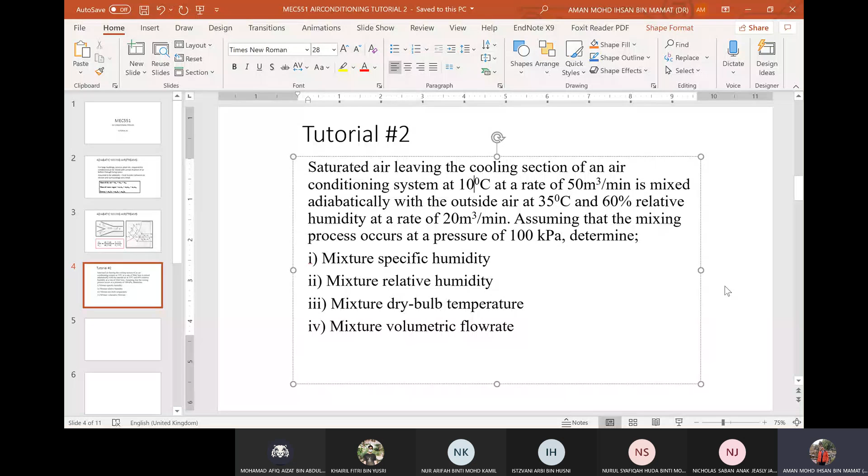Alright, so last week we have gone through the part 1 sections for the air conditioning. So today I will proceed. I will continue with the second part of the tutorial, which is we're going to look at the adiabatic mixings of the air stream. So which is actually for the adiabatic mixing of the air stream, usually we are concerning about the energy consumptions for the building.

For treating the air that enters the building, one of the, for example, if you are dealing with the cold environment, and then in order to increase to the required temperature or desired temperature, you have to put some heaters to heat the fresh air, and then bring it to the environment that we are required. So this heating process requires the use of energy.

Okay, so one of the innovative methods that have been presented, which is actually we can return the air that have gone through the room environment, and then we return that air and mix it together with the fresh incoming air. So as you know, the room air is at higher temperature because it takes the heat from the human or spaces that it has cooled down.

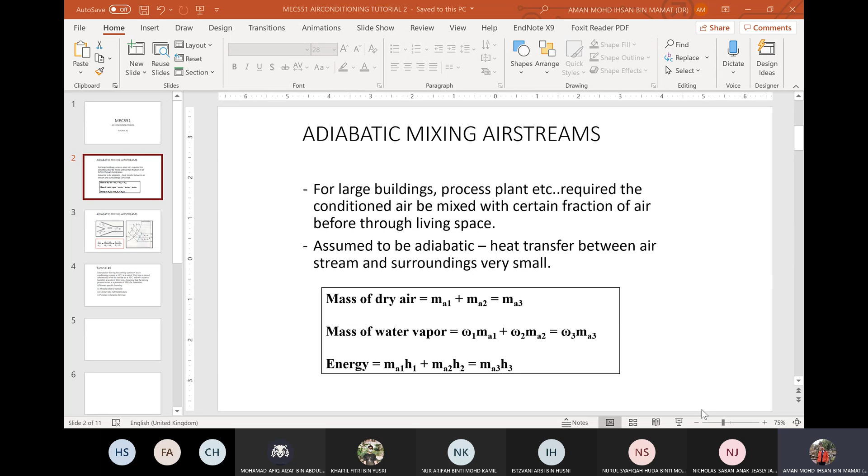Okay, so if we take the mass balance, this is a mass balance for the required conditions, where you have to do the mass balance for the dry air. Okay, so whereby we have the stream 1, and then this is stream 2.

With the stream 1 temperature T1, relative humidity phi 1, and then specific humidity omega 1. And then for stream 2, the temperature coming at T2, phi 2, and omega 2. And then it leaves in the mixture region condition as state 3, where the temperature T3, relative humidity phi 3, and then omega 3 for the specific humidity.

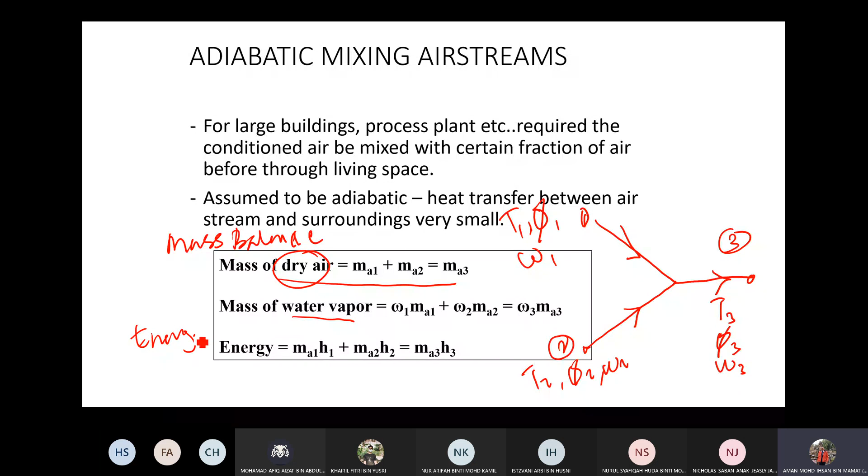So bear in mind in the air conditioning process, or in all of the fluid mechanics and thermodynamics processes, that you have to do the mass balance and energy balance. So the mass balance that we have here in the air conditioning process is you have to split between the dry air mass balance and water vapor. Okay, and then that's why you have to do the energy balance.

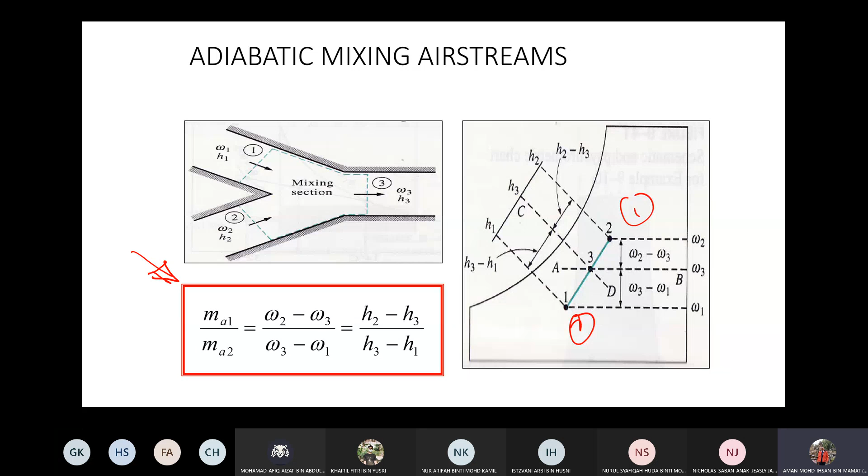So it's going to be a different way of how you interpret the technical perspective of this. Okay, so the equation, the correlation will highly depend on how you derive the correlations, based on the mass balance and energy balance.

Okay, so as for our tutorial, the second tutorial, what is the essence of this tutorial, the outcome that I want to give to you today, is that first you have to do the process for the adiabatic mixing. And the second one, we are not going to use the psychrometric chart for this one.

So because why? Because the mixing process occurs at the pressure of 100 kPa, which means that the psychrometric chart is invalid for these particular conditions.

Okay, for this tutorial number 2: saturated air leaving the cooling section of an air conditioning system at 10 degrees Celsius at the rate of 50 meter cube over minute is mixed adiabatically with the outside air at 35 degrees and 60% relative humidity at the rate of 20 meter cube per minute. Okay, assuming that the mixing process occurs at a pressure of 100 kPa, determine the mixture specific humidity.

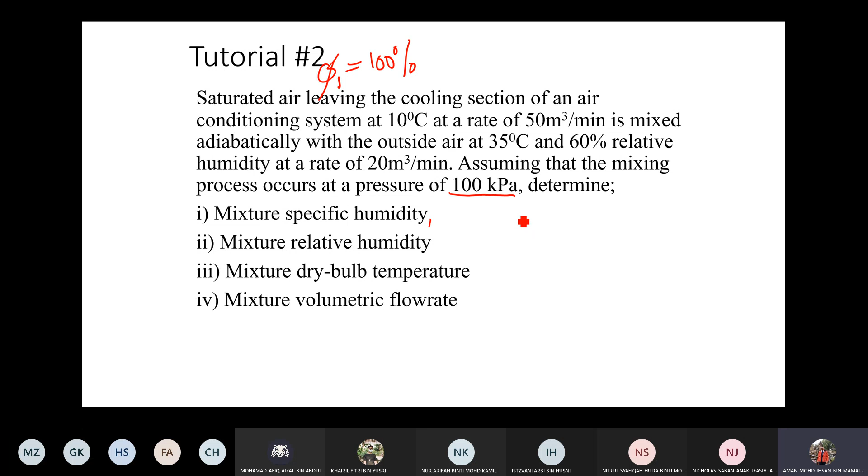Okay, so if we draw a schematic diagram, for this is state 1, where at state 1, T1 equal to 10 degrees Celsius, phi 1 equal to 100%.

Okay, come with the state 2 condition, T2 35 degrees Celsius, relative humidity phi 2 60%, and then the volume flow rate equal to 20 meter cube per minute. V1 equal to 50 meter cube per minute.

Okay, so you need to convert that to seconds later. And then leave it with a mixture, we don't know what will be. So the temperature T3 we don't know, V3 we also don't know, and then omega 3 we don't know how much.

And then M dot A, of course you can get M dot A3 equal to 50 plus 20, this is 70 meter cube per minute. So we note that the inlet, this one is S1, this is S2, and this is S3. Okay, for the state 3, okay, so let's say

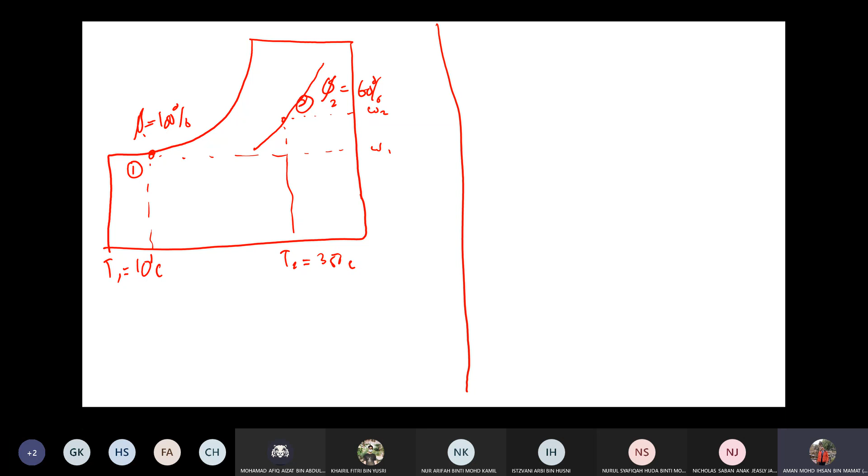Okay, so this is the omega 2, this is omega 1, but it is not exactly happening on the psychrometric chart, because this is just the psychrometric chart. You cannot take the data, just use this one to visualize what are the processes that happen, if it happens on the psychrometric chart, so that you can pre-estimate where will be the location, or the state of the processes that happen at the beginning and ending of the processes on the psychrometric chart. Okay, so this is state number 3.

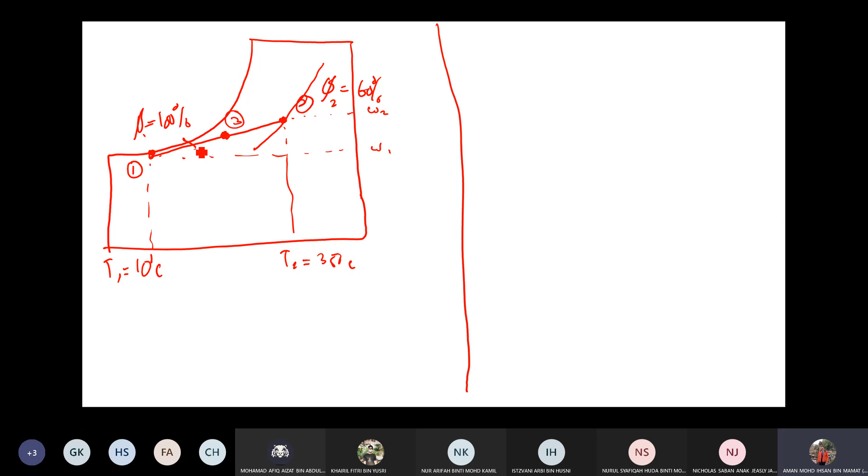Okay, so which means you will be in between, this is in between the line. So this we don't know the temperature, T3, we don't know. And then relative humidity, we also don't know what will be the relative humidity and the specific humidity. So this is omega 3.

Okay, and then if you project with H1, H2, okay, so this is H1, sorry, this is H2, this is H3. Okay, so let's do the calculation.

Okay, firstly for state 1, okay, state 1, at state 1, the temperature T1 is 10 degrees Celsius, P1 equal to 100 kPa, P atmosphere, P pressure, P total, summation of pressure, and relative humidity equal to 100%.

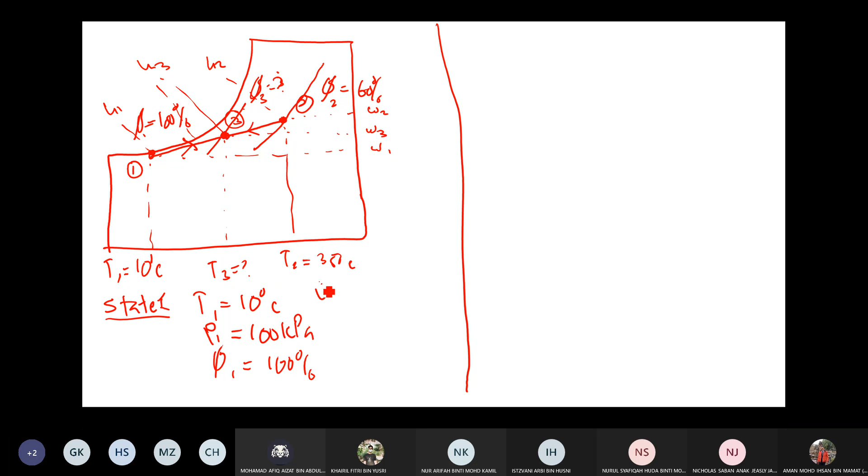Okay, so first we need to convert this, V1 equal to 50 meter cube per minute. Okay, so because you have to do the mass balance and energy balance, firstly it is not in the right form that we want for the mass flow rate.

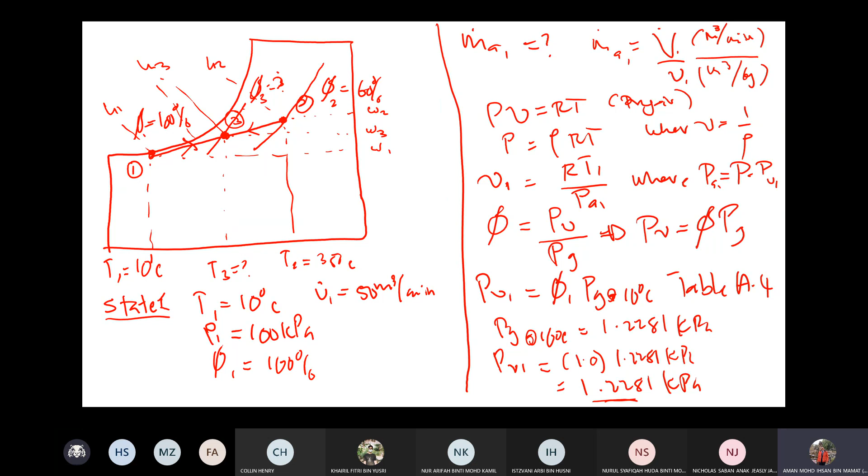And then belahkan lagi saya punya ni. So PV dah ada, you kena dapatkan nilai apa dia? PV dah ada. Previously, nilai RTA. Okay, so V1 sama dengan RT1 over PA1.

Which is R gas constant for dry air. Berapa nilai dia? 287 kan? 0.287 kPa, boleh jugalah nak pakai that value. 0.287 kilojoule per kilogram, ya kita pakai ni terus.

Degree Celsius. And then T1 sama dengan berapa tadi? Oh sorry, this is Kelvin ya. T1 is 10 degree Celsius. Jadi 273.15 plus 10 degree Celsius. Bahagi dengan PA. P adalah 100 minus 1.2281 kPa.

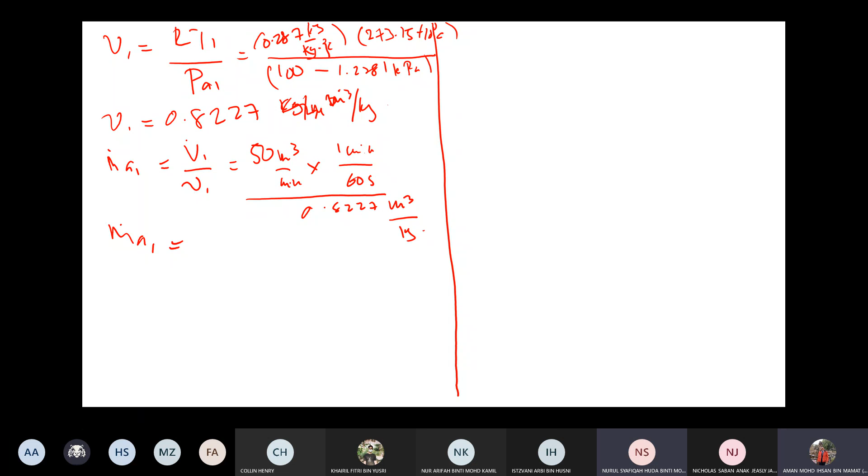Okay, yang ini you kena darabkan dengan 1 minit sama dengan 60 second bahagi dengan 0.8227 meter cube per kilogram. So m.a1 is equal to berapa? Berapa m.a1? 1.0129, 1.013 lah kilogram per second ya.

So that's m.a1. Omega 1 berapa? Omega 1 sama dengan apa equation? Omega 1 sama 0.622 PV1 over P minus PV, betul tak? Betul. Okay so jadi equationnya 0.622 darab 1.2281 kPa over 100 minus 1.2281 kPa.

So berapa unit omega 1, specific humidity? Berapa nilai dia? 7.73 exponent negative 3, 7.73 gram per kilogram of dry air. Eksponen negatif 3 ialah 7.73 gram per kilogram of dry air, ataupun you kalau nak gunakan that value yang lebih bagus, 0.00773. Betul, ya, kg of H2O over kg of dry air.

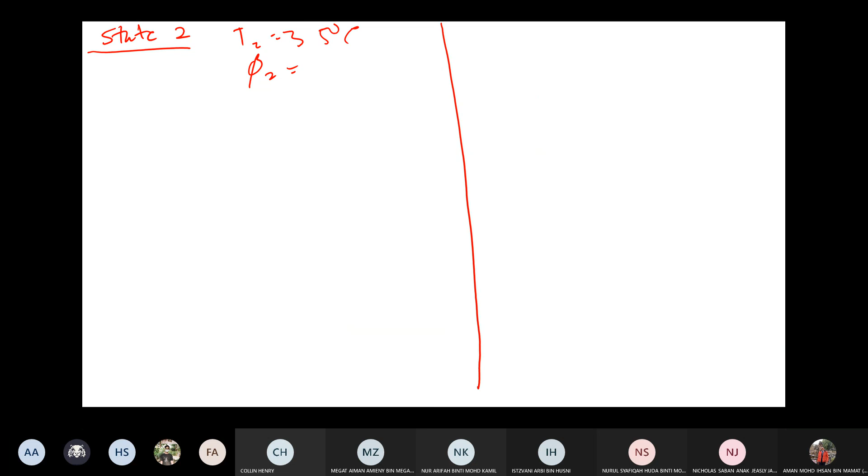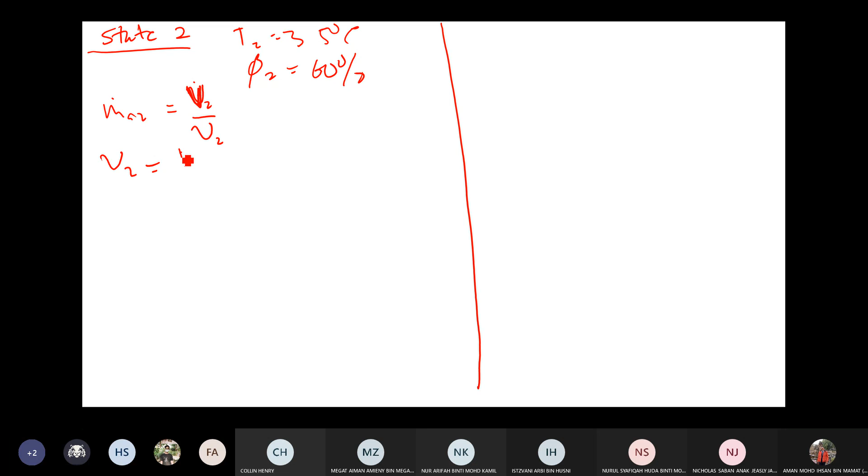Relative humidity 60%. Okay so again you kena dapatkan nilai M dot A2, which is M dot A2 equal V2 bahagi dengan specific volume V2. Okay so where V2 sama dengan RT2 over PA2. Which is PA2 sama dengan apa?

PA2 sama apa? 0.6 darab PV2. Sekejap ya. 0.6, okey sekejap, ya 0.6 darab PG at 35 degree Celsius sama dengan berapa? PG at 35 degree Celsius, 5.6291.

You kena tengok table ya, 5.6291 kPa. So you have to look at table A4. Okay look at table A4. So V2 sama dengan 0.287 kilojoule kilogram Kelvin, T2 35 degree Celsius, 273.15 plus 35 over PA2. PA2 is equal to 100 minus...

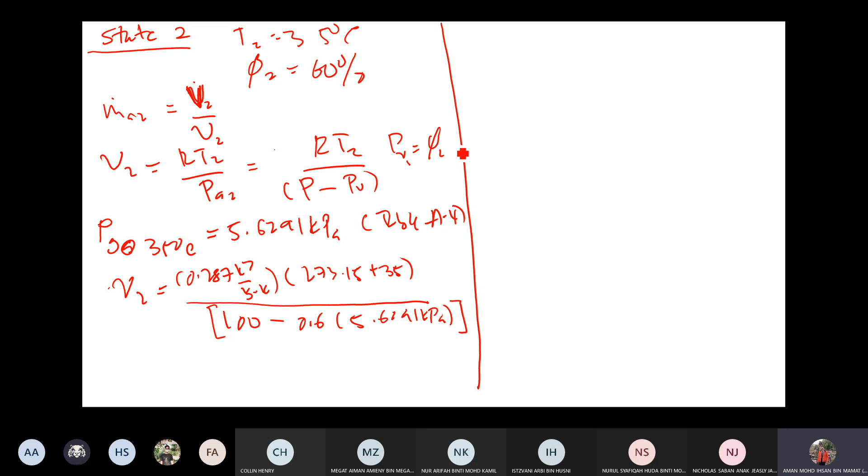Okay, RT2 over P minus PV. Okay, where PV is equal to, PV2 sama dengan phi 2 kali dengan PG at 35 degree Celsius. Ni puncanya. Okay, so berapa tu nilai V2? 0.6... 0.915, unit dia meter cube per kilogram.

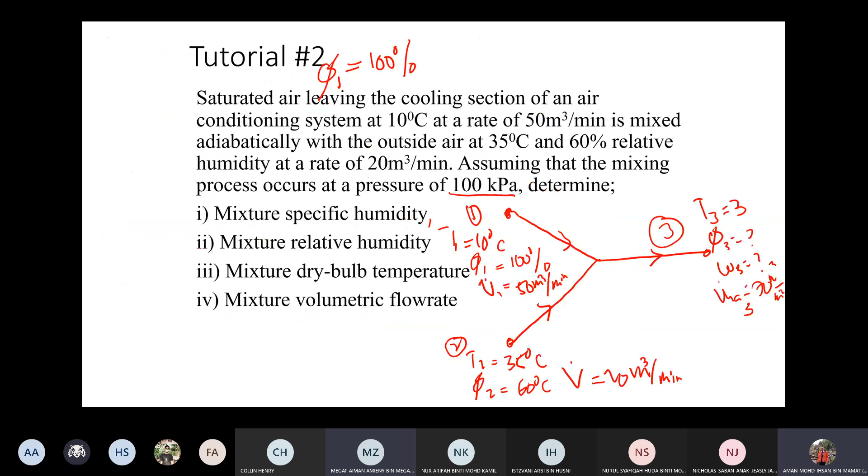So m dot itu sama dengan bla bla bla. Berapa? 0.364 kilogram per second. Okay, alright, so dah settle yang itu, kita kena dapatkan nilai omega 2.

Omega 2 sama dengan 0.622 PV over P minus PV. Okay.

0.622 PV. Tadi kita kira 0.6 darab dengan 5.6291 kPa over 100 minus 0.6 darab 5.6291 kPa. Okay, so omega 2.

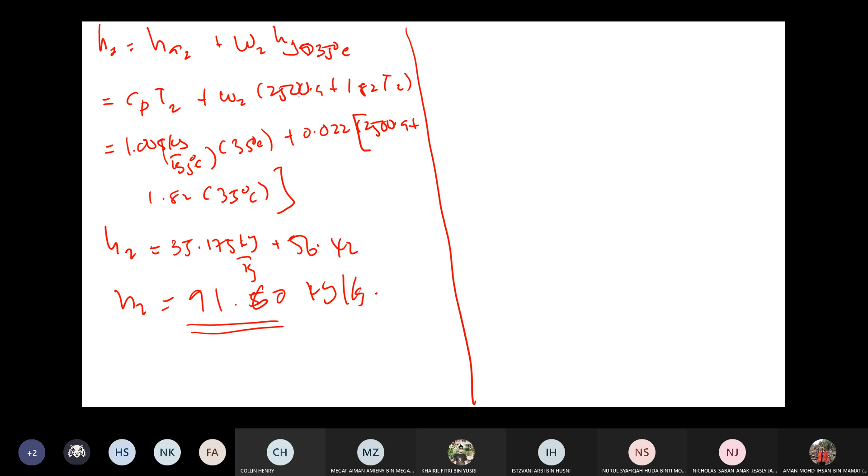So from here, you kena buat mass balance dengan energy balance. Okay. So information dah dapat. So kalau you guna psychrometric chart, all this information you boleh dapat within 3-4 minit. You tengok dalam psychrometric chart, you tarik data tu, you boleh dapat terus. But if it is not equal to 1 atmospheric pressure, then you have to do the calculations.

Okay, mass balance. We do the dry air mass balance, yeah. M dot A1 plus the summation of mass in equal to the summation of mass out. So untuk dry air, M dot A1 plus M dot A2 equal to M dot A3. So M dot A1,

Berapa tadi M dot A1? 1.013 kg per second plus 0.364. Berapa tu nilai dia? 1.377.

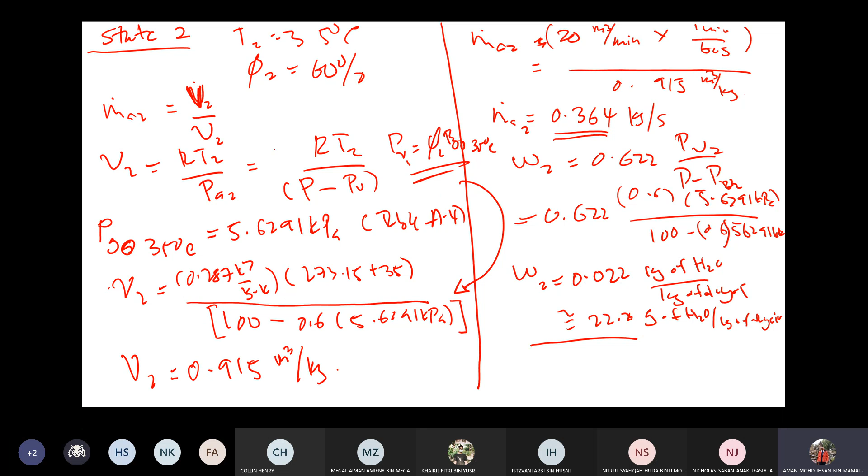Berapa tu equationnya? M dot A1 dah ada omega 1. Omega 1 berapa tadi? Omega 1 0.0073. M dot A1 1.013. Okay.

Plus M dot A2 omega 2, berapa omega 2 tadi? 0.022. M dot A2 0.364 bahagi dengan M dot A3. M dot A3 1.377.

Okey, berapa omega 3? 0.011. Omega 3 sama dengan 0.011 kilogram of H2O over kilogram of dry air. Okay, alright.

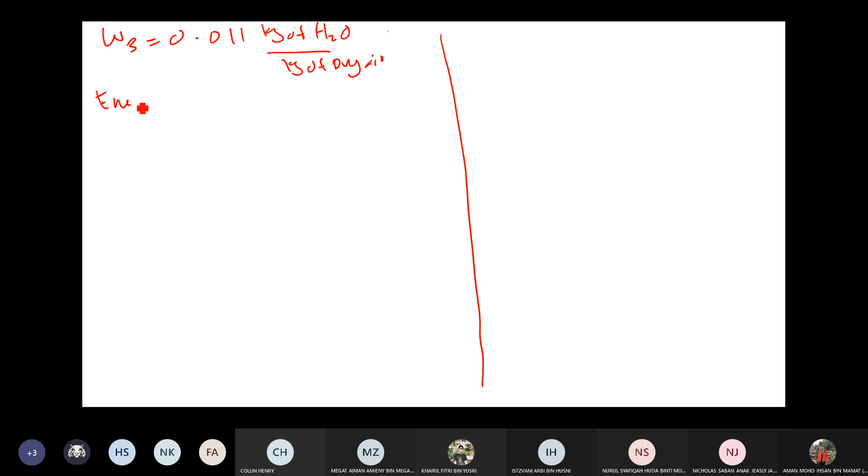Energy balance pula. Summation of energy in equal to summation of energy out. Summation rate of energy in is equal to summation of rate of energy out. Okay.

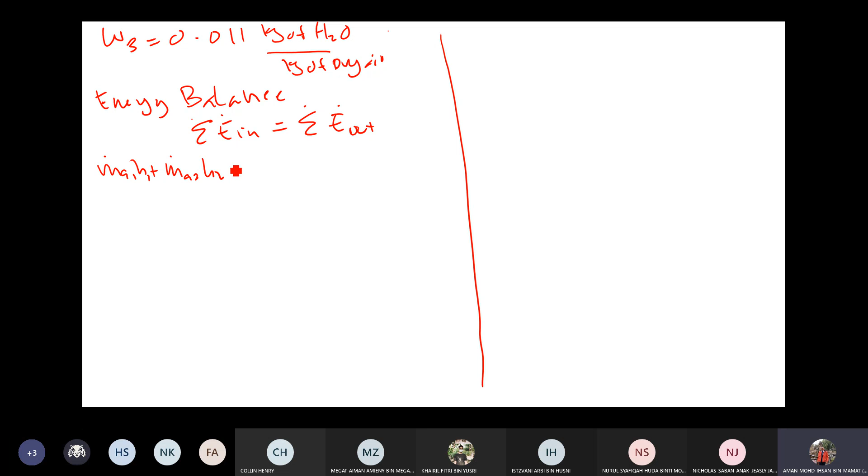Similarly, M dot A1 H1 plus M dot A2 H2 equal to M dot A3 H3. So H3 is equal to M dot A1 H1 plus M dot A2 H2 over M dot A3.

Tadi dah kira kan? M dot A1 1.013, H1 28.51, plus M dot A2 0.364, H2 91.60, over 1.377.

H3 sama dengan berapa? H3 sama apa tu? Apa nilai H3? 45.19 kilojoule per kilogram ya. Okey.

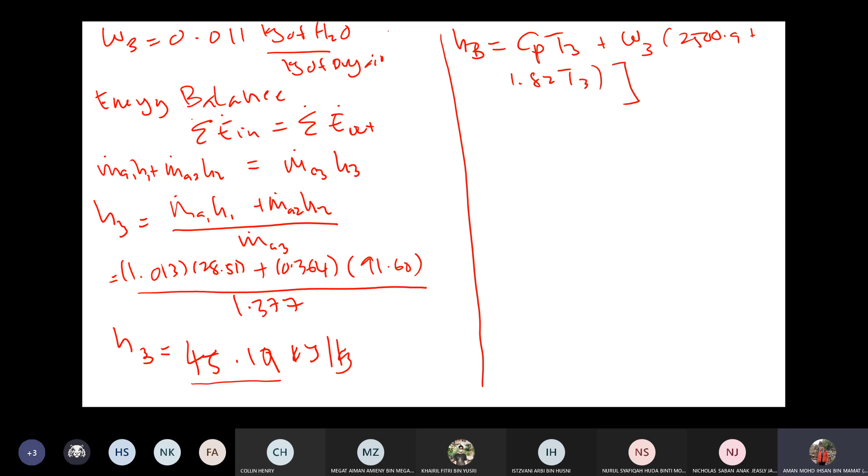Okey, boleh rungkai equation? Cp T3 tambah omega 3 kali 2500.9 tambah omega 3 darab dengan 1.82 darab dengan T3. Okay?

Alright, so you kumpul sana dengan sini. Okey, kumpul sana dengan sini. H3 tolak dengan omega 3 kali dengan 2500.9 sama dengan Cp T3 tambah omega 3 kali dengan 1.82 kali dengan T3. Okey?

So bolehlah dapat yang sebelah sini ya. So sebelah sini apa? You kira nanti sekejap. 45.19 tolak dengan omega 3, berapa tadi? Omega 3 kita, what's the number for omega 3? Omega 3 tadi mana? 0.011, kali 2500.9 sama dengan that, bla bla, sama dengan apa tu?

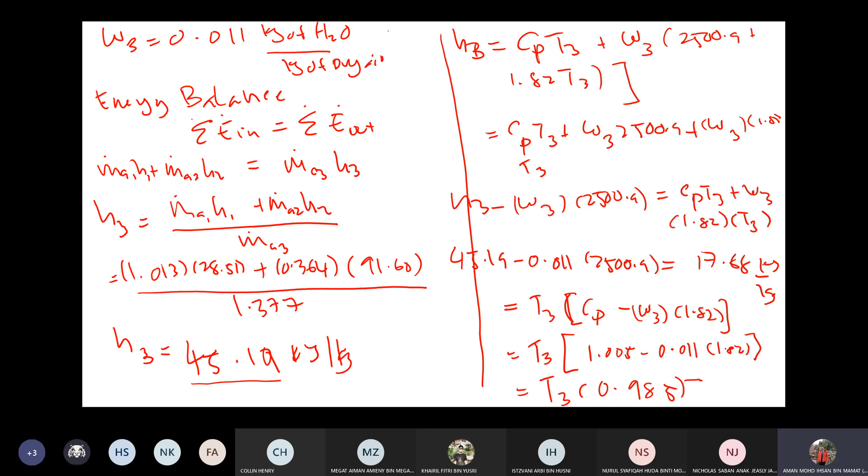So T3 sama dengan 17.68 kilojoule per kilogram bahagi dengan tadi itulah 0.985. Berapa tu? 18.04.

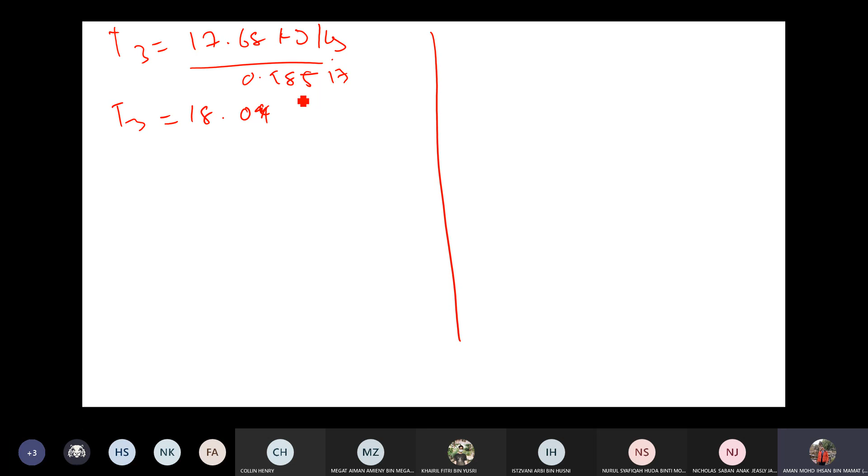18 degree Celsius, so our T3 is equal to 18 degree Celsius. So relative humidity, phi 3 sama dengan berapa? phi 3 sama dengan PV over PG at 18 degree Celsius.

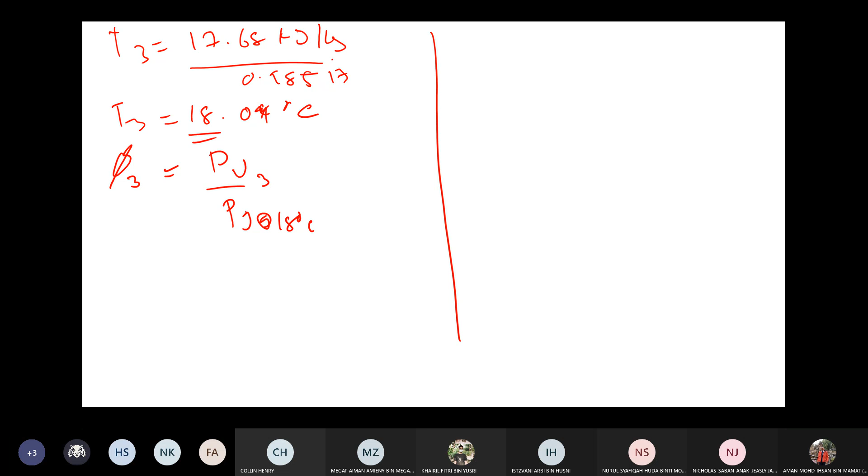Okay, so PV3 pun kita tak tahu berapa kan. Yang ni pun this equation we cannot use. Boleh ke pakai equation ni? Tak boleh kan.

Kita kena gunakan this equation. Omega 3 sama dengan berapa ni? Omega 3 sama dengan PV over PA, 0.011. 0.622 PV over P minus PV. Okay, you kena dapatkan nilai PV itu dulu.

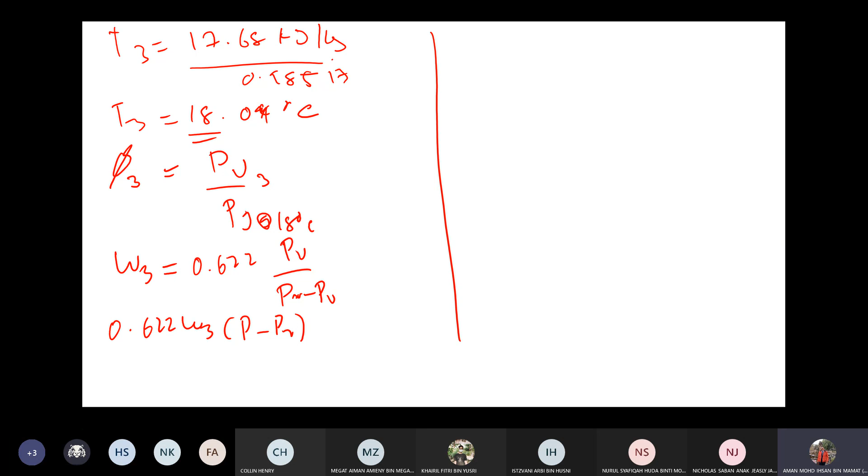Ya, yang mana, rearrange balik equation lah. 0.622 darab, 0.622 omega 3 P minus PV. Okay, so saya just reorganize balik equation ni je sebenarnya.

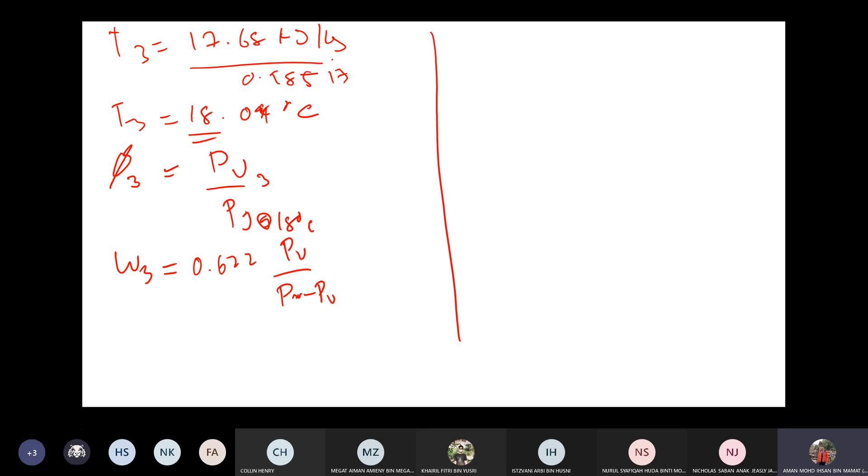Saya tak ingat sebenarnya equation dia. Most of the equation banyak yang saya tak hafal. Tapi the best thing is that you have to understand macam mana nak reorganize balik the equation tu. Okay, so omega 3 darab P minus PV equal to 0.622 PV.

Okay, you reorganize balik this equation. Omega 3 P minus omega 3 PV equal to 0.622 PV3, so omega 3 P equal to 0.622 PV3 plus omega 3 PV3.

PV3, 0.622 tambah dengan omega 3. So PV3 sama dengan omega 3 P over 0.622 plus omega 3. Okay, so dapatkan nilai PV3 dulu.

So 0.011 kilogram of kilogram dry air, P 100 kPa, 0.622 tambah 0.011. So sama dengan apa tu PV3? Berapa nilai PV3 tu? 1.737, 1.738 kPa ya. Alright.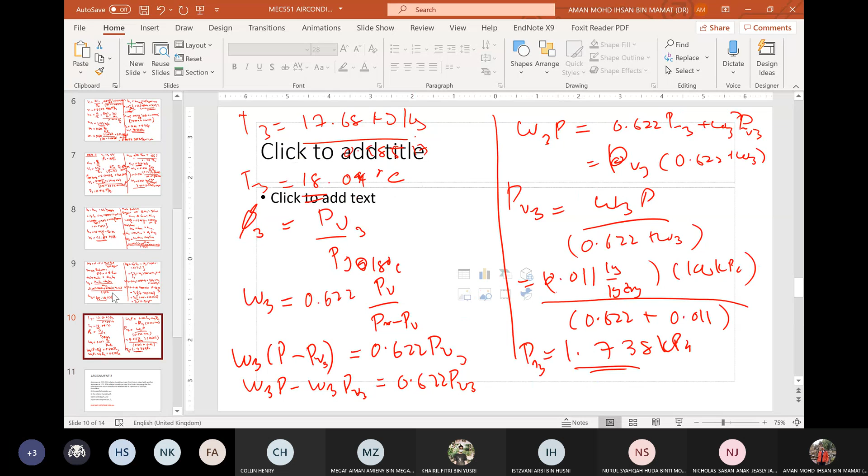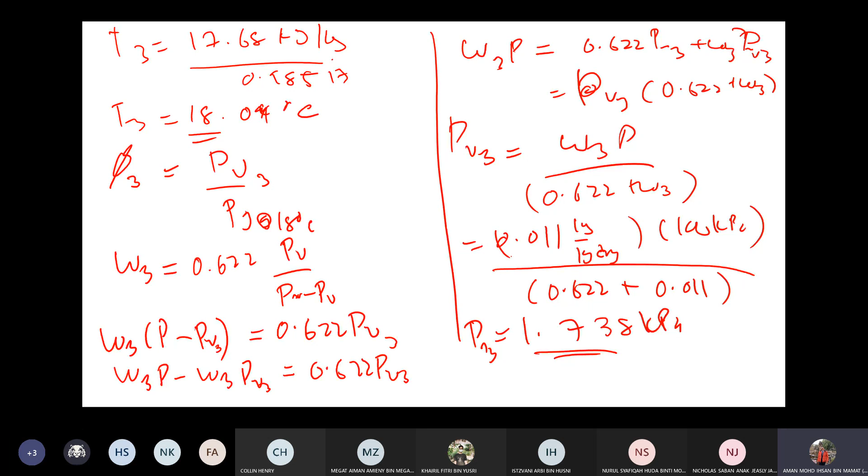So the next one, dah keluar ya, 1.738 tadi. Okay, so V sama dengan PV3 over PG at 18 degree Celsius. So PG at 18 degree Celsius sama dengan berapa? You kena interpolate.

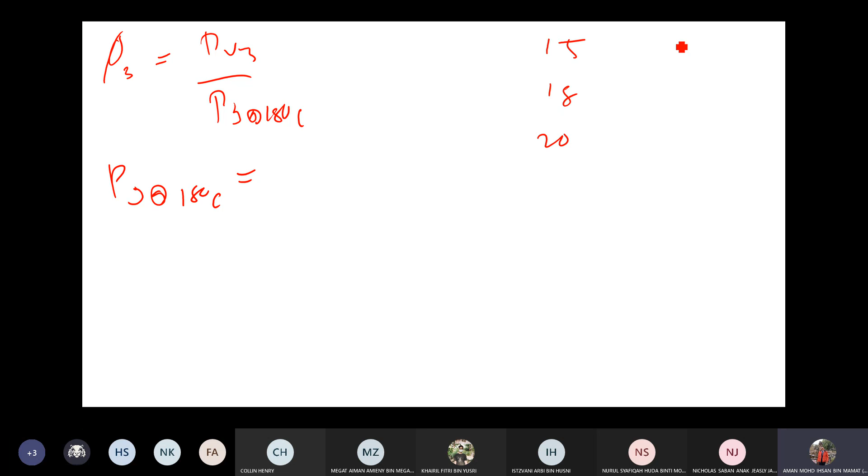Dekat table, interpolate, you kena interpolate. Ya, so jadi berapa tu? Dia 15, 18, 20. Okay, so sini 1.7057, so 2.3392. So sini berapa? Macam mana nak buat ni?

Paling cepat, yang ni 15, 18, ni 18 per ni 3 kan? Yang ni beza dia 3. 3 per 5 adalah 60%. So 60%. Cara nak kira paling cepat adalah 1.7057 tambah 2.33 tambah dengan 0.6 darab.

2.3392 minus 1.7057. Okay, 2.0858. 0858. 2.0858 kPa.

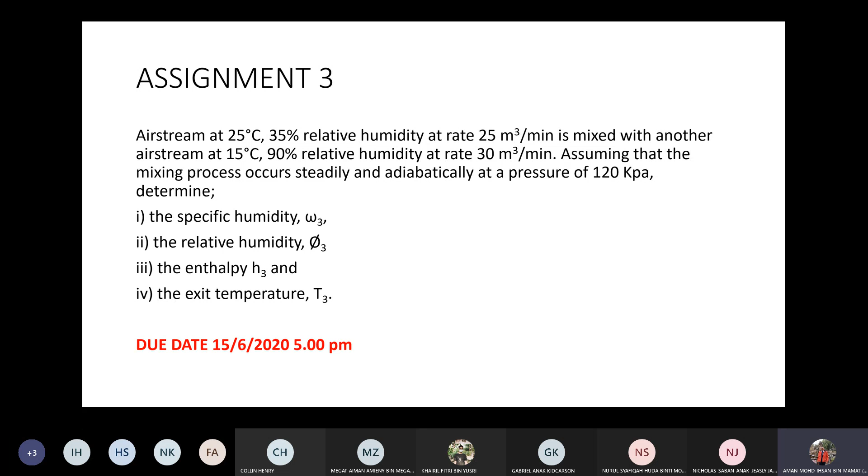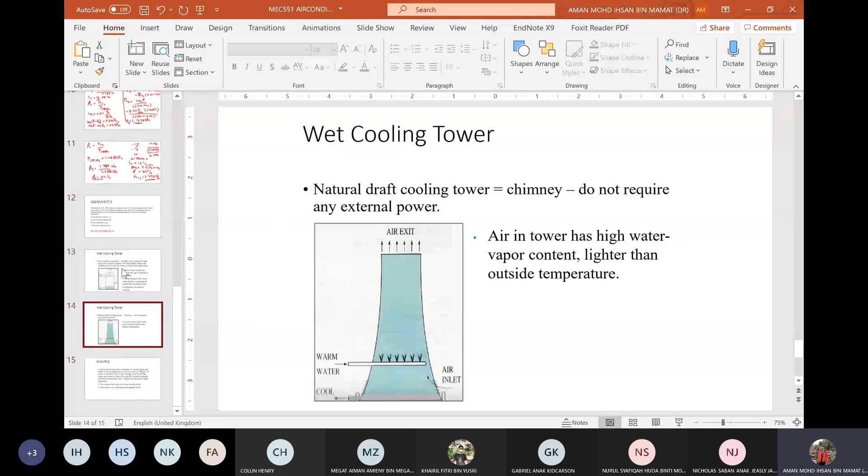Oh, tapi kita tak sempat buat wet cooling towers. Dr. Wan ada tunjuk wet cooling towers ke bawah ni? Dia ada tunjuk ke wet cooling towers? Dr. Wan ada tunjuk ke baru ni? Macam tak ingat je.